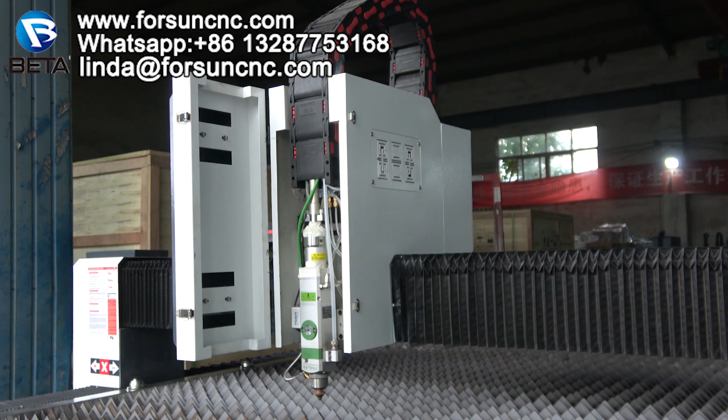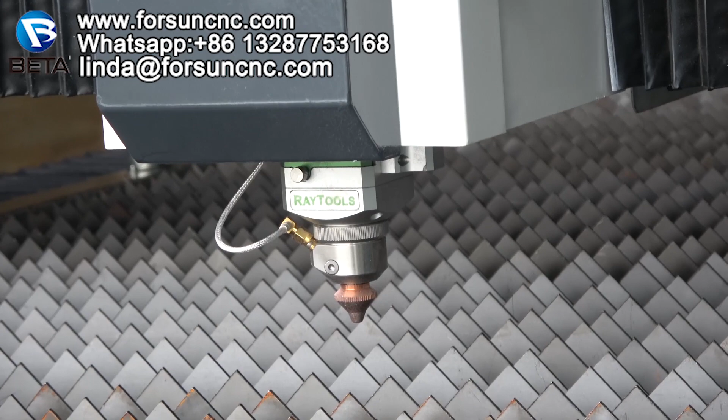First, I will introduce the controller to you. For the controller, we have two parts: one is a controller in the computer, another is a remote controller. For this, this is the CypOne we use.

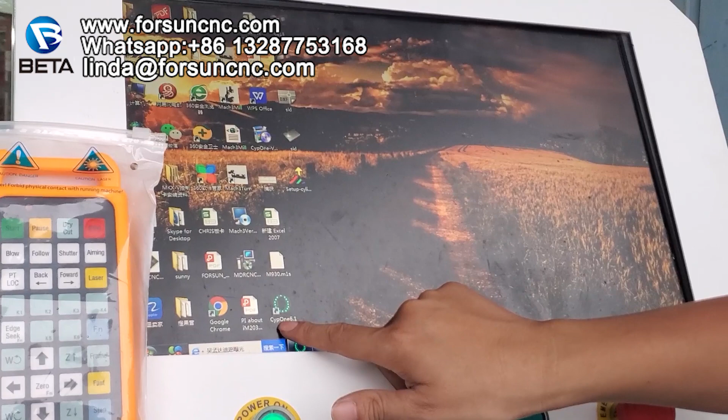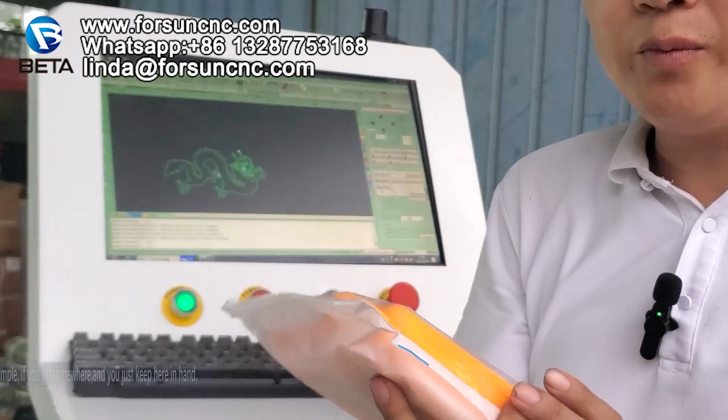This is a controller. When we open it, it will be like this. And this is a remote controller. If, for example, you go somewhere, you just keep it in hand, then it is okay. But make sure there is a Wi-Fi connection to the controller. This one connects to the computer, then this one can be used.

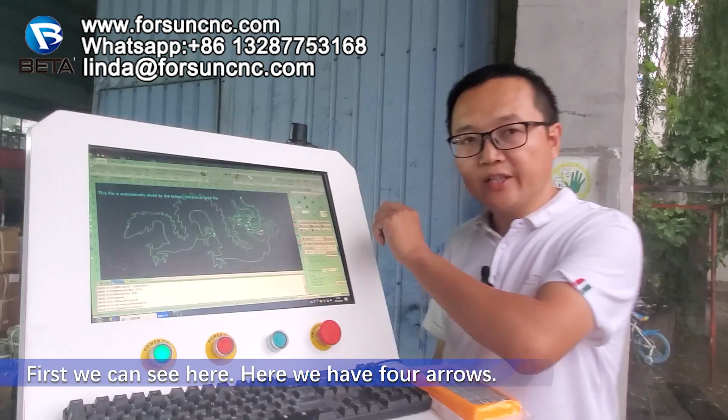Now let me introduce the controller, how to use it. First we can see here, we have 4 arrows. This arrow is for the X, the horizontal 2, it's for the X. The vertical 2 is for the Y. And here is for the Z, these 2 are for the Z.

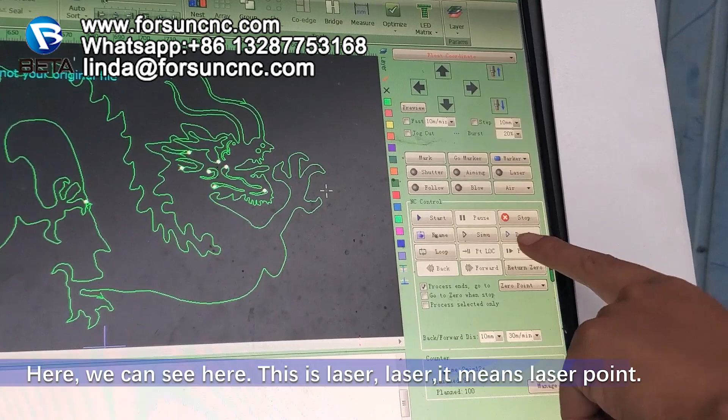Here we can see, this is laser. Laser means laser point follow. When we push the follow, the laser head will go to the position where it will cut. And blow is for the air blow. And here is start, start is for the program start. For the others, always no use.

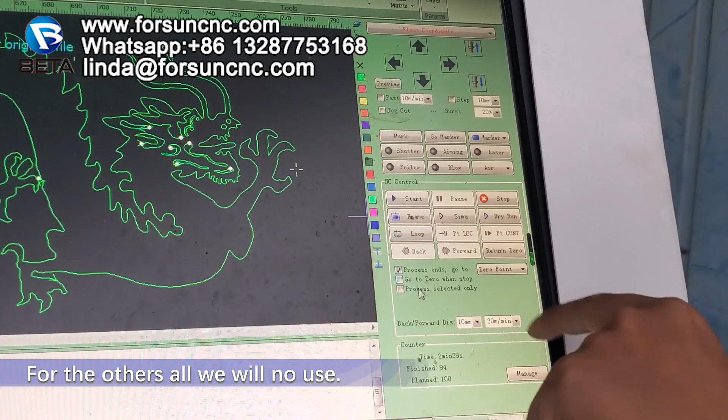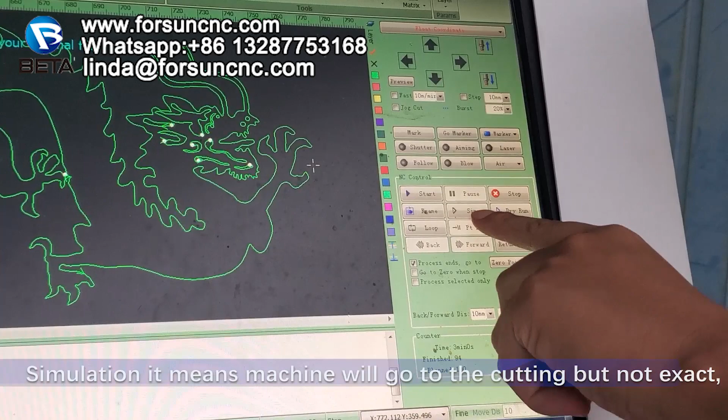Here has one frame, we can see frame. When you press frame, the machine will move to the frame first to check whether the cutting material is out of the space or not. This one is a simulation. Simulation means the machine will go to the cutting but not exact, just for checking.

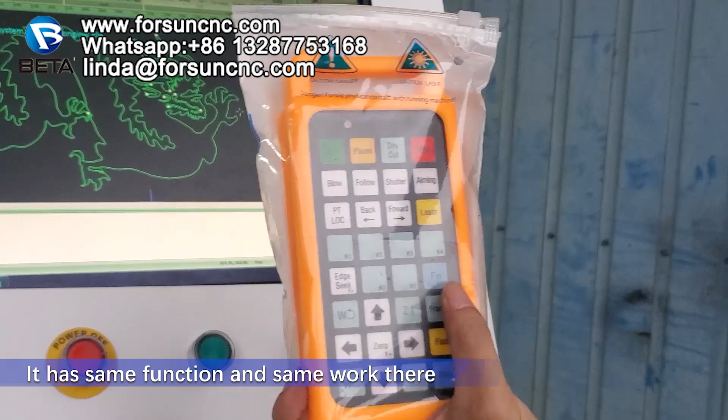Same thing for the laser, for the remote controller. It has the same function and the same work there.

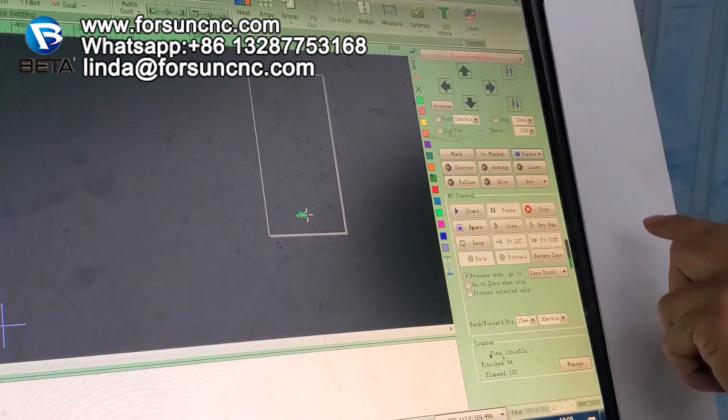Here I want to introduce the marker especially. For example, when you work on one plate or several plates, you need several working start points, then we use the markers. When we open it, you can see there are 6 marks. 6 marks means 6 working start points, that means you can set 6 working start points there: 1, 2, 3, 4, 5, 6.

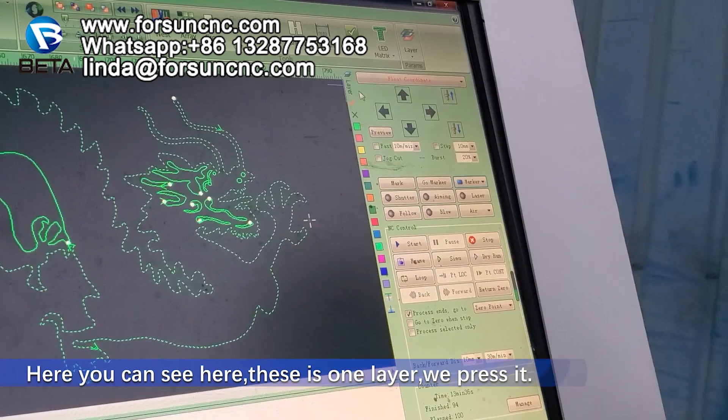You can see here, there is one layer. We press it, we press here. Here has a layer, you can see here, cut speed. Here we usually need to set. And here is a lift height, here no need to set.

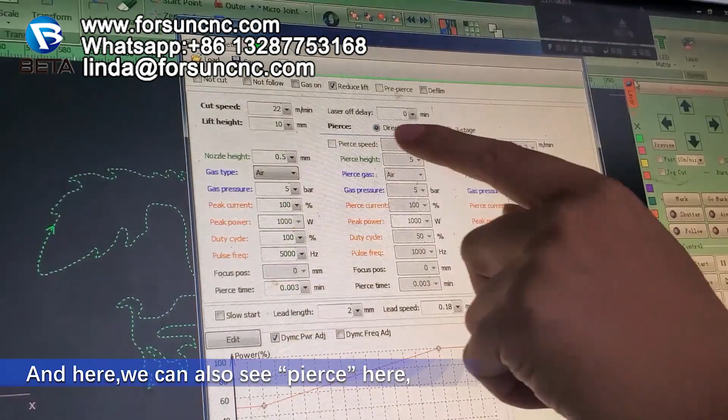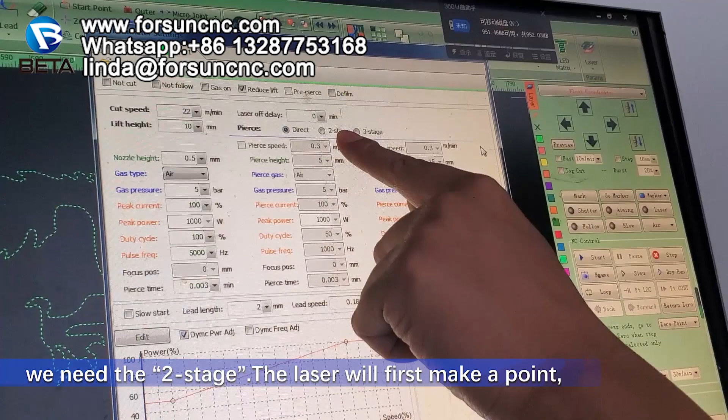When you cut different thickness, you need to set a different cut speed. And here we can also press here. If for very thin material like 1mm, 2mm, something like that, we use direct. But if we cut thick materials like 5mm steel, we need 2 stage, it means the laser will first make a point there, then second cutting. If 10mm, something like that, we need 3 stage, it means the laser will work 3 stages first.

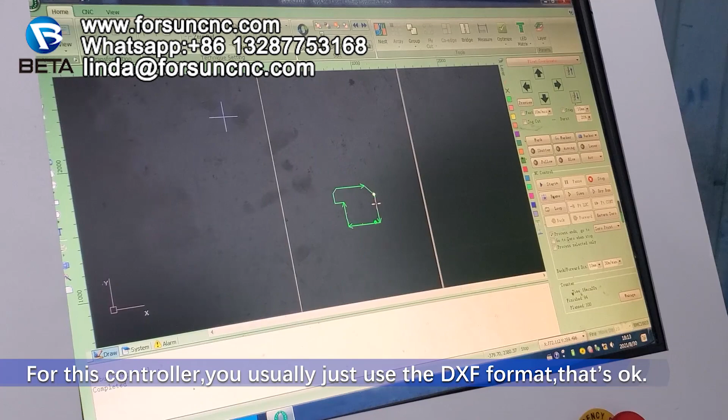The next step is how to load the program. For this controller, you usually just use the DXF format, that is okay. For example, the file first, then we find it in the files. For example, this one - this is the file we need to cut.

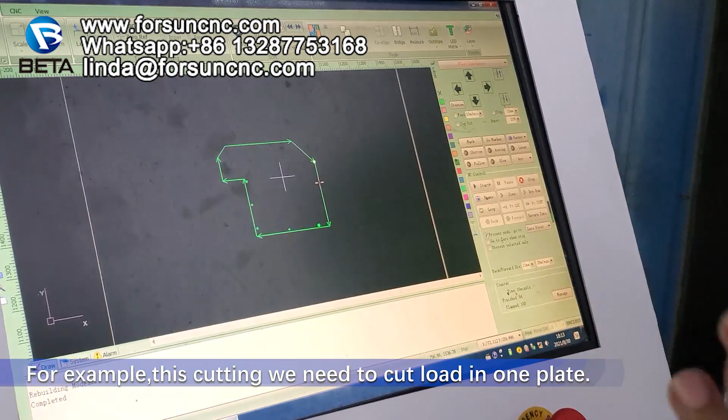For example, this cutting, we need to cut a lot in one plate. Then how to do it? Let me teach you step by step. For example, we cut this cover just now, we just load into the controller. First we need to choose it, then we need to calculate, measure it.

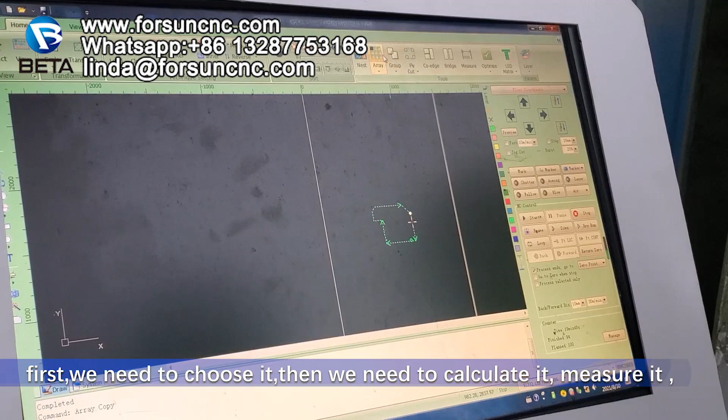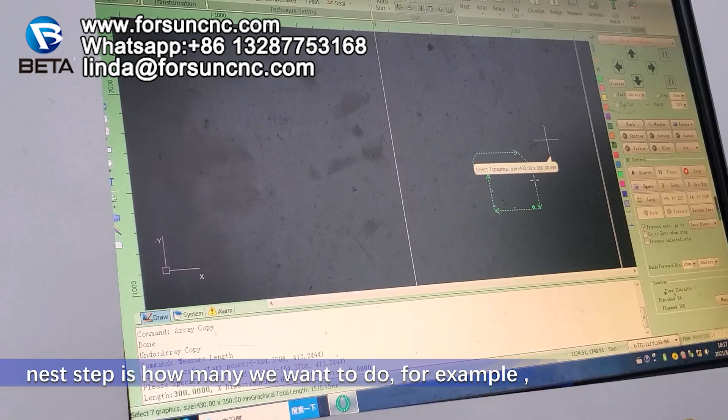Is it correct or not? Measure - you can see we can measure it. The measure here, there is. If it is correct, then we continue the next step. Next step is how many we want to do. For example, we want to cut 16. We choose the array.

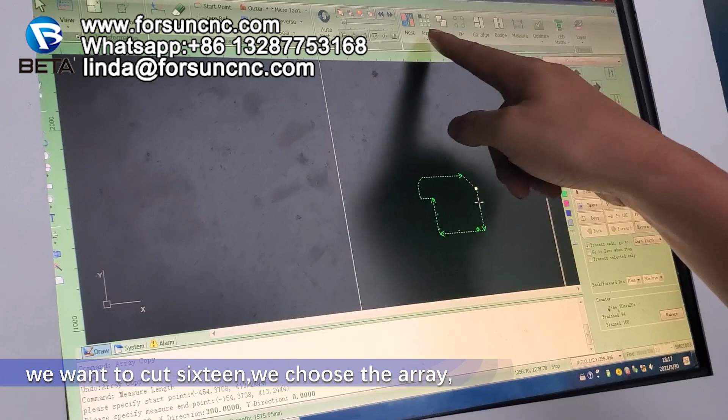Okay, 16. It means row 4. This one also 4. 4 by 4. It is 16. Okay, you can see now it is 16.

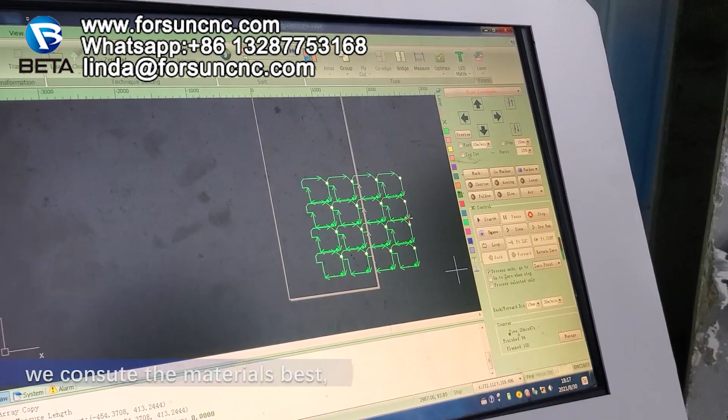Then we do the nesting, because we need to know how many plates we need and how to cut, we can save the materials. This is the best. We choose the nest. For example, if our material is 1.2, 2.4, this is our material, then we just press OK.

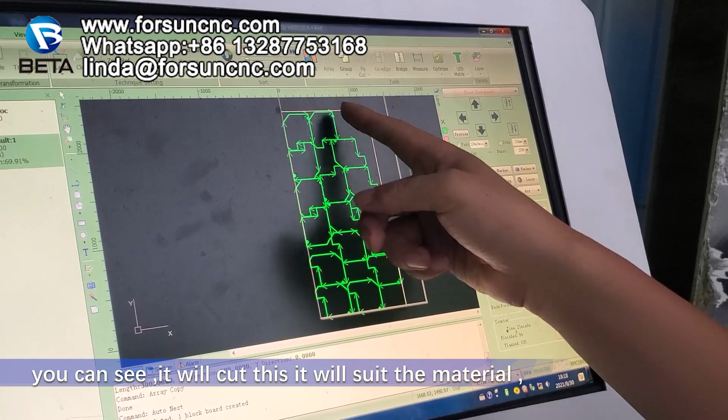Then you can see it will cut like this. It will suit the material. It will cut like this. It is a nesting function.

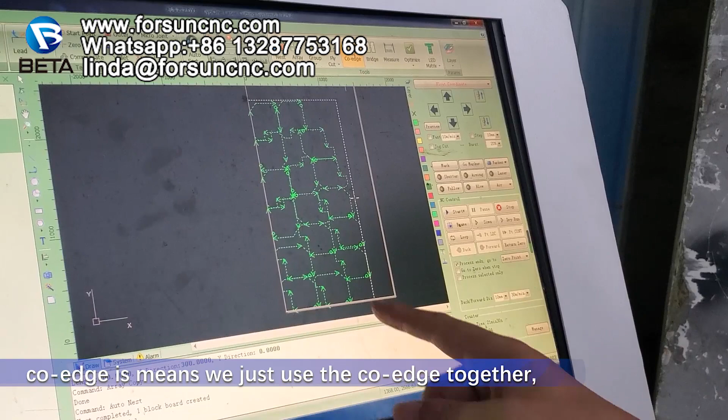And here we also want to show you two things. One is a bridge, one is the co-edge. Co-edge means we use just the edge together.

You can see here, nest completed, one block board created. It will use the co-edge together. Here is the bridge. Bridge means it will connect there a little.

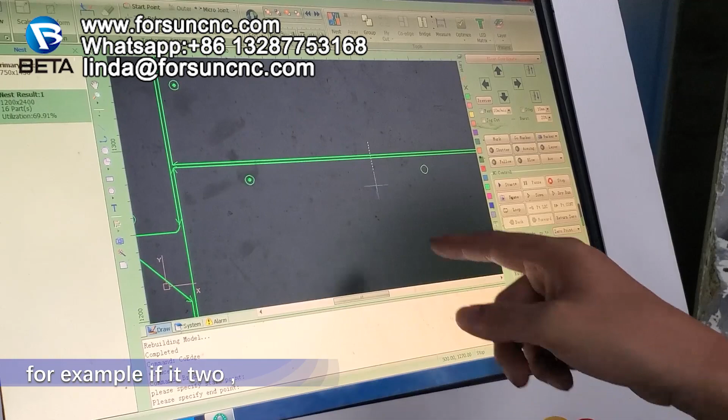For example, if this piece, we don't want them to cut down completely, we need to have one bridge. Then you can set some parameters here. We press OK. Then it will be bridged there.

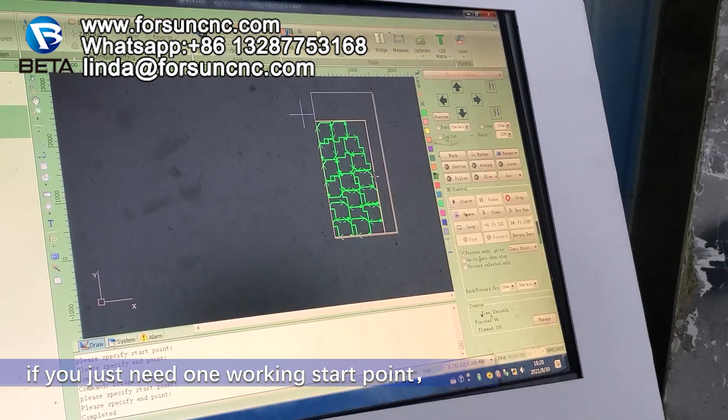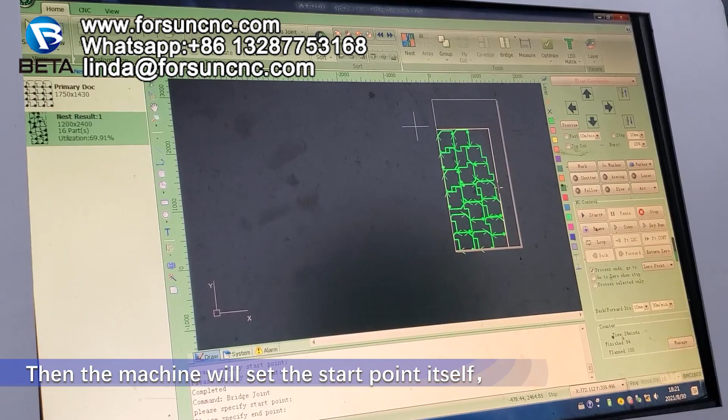For the fiber laser machine, if you just need one working start point, then no need to set manually. For example, if we want to cut this plate here, we just move the fiber laser head to be here, and then we press the frame.

Then the machine will set the working start point itself. Of course, if you want to set some other working start point, for example, you want to set 5 or 4, just use the markers. Later I will introduce this to you.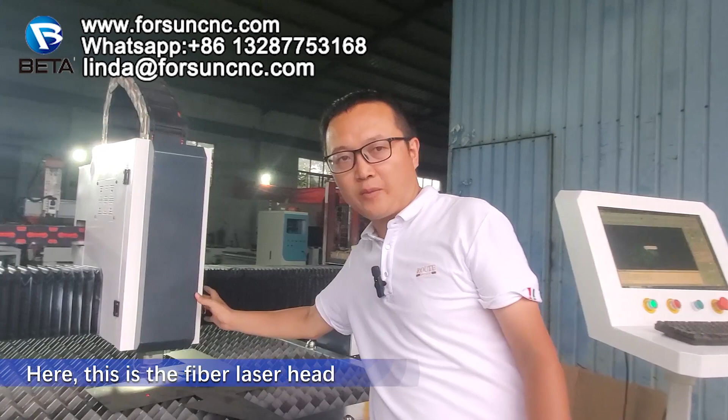Now let me introduce the fiber laser head to you. This is the fiber laser head. We made one cover for the pretty look and to also protect the laser head. When we open it, you can see.

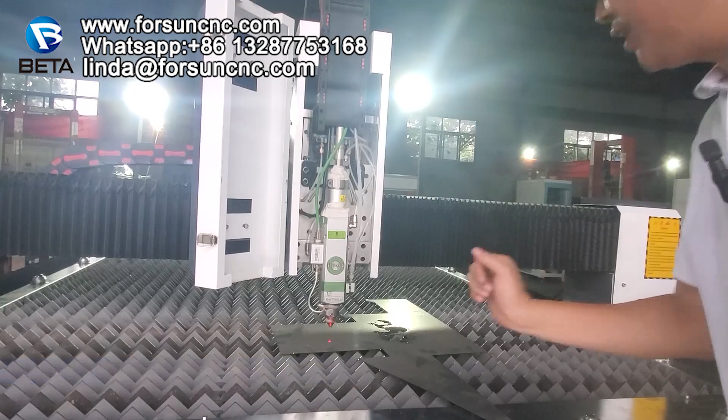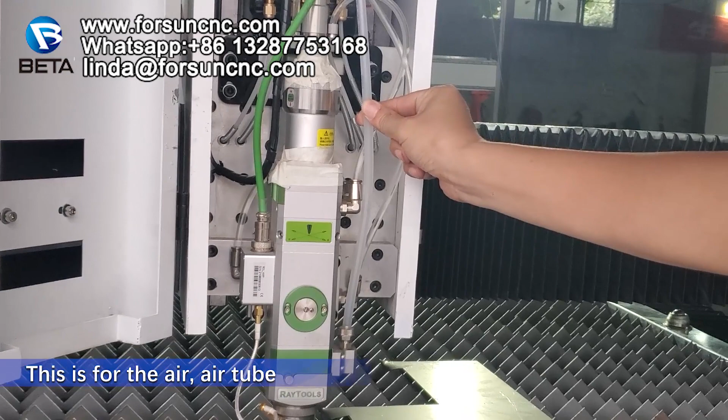Here we use Raytools. This is the brand we used. And here you can see, here is one tube, this is for the air tube. And these tubes, others are for the water tubes. Here has one electrical cable.

It connects to here. This equipment is for the height adjusting. For example, if the plate we put here may be uneven, like this or like this, not flat, the laser head will adjust the height itself by this one.

And here we also have the red dot. Red dot position means the laser will cut here. The most important thing is here, this one.

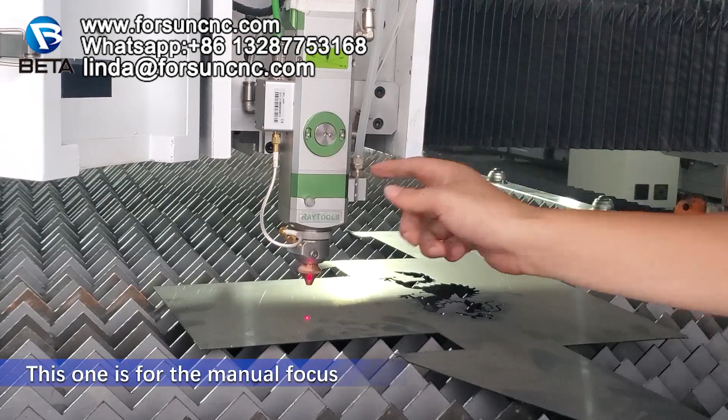This is the focus. This one is for the manual focus. Usually speaking, there is one mark here. You can see there is one mark.

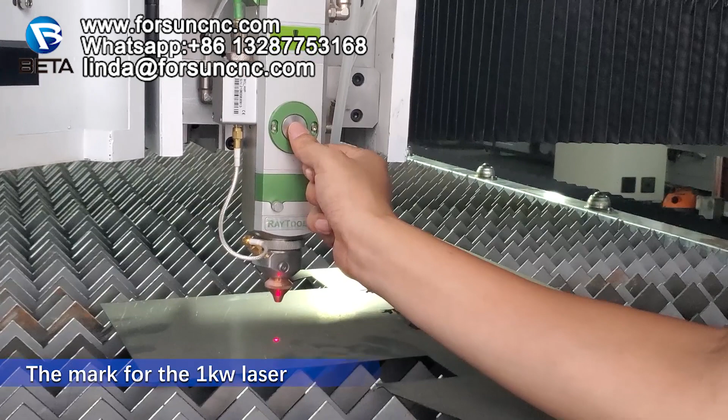See clearly, one mark. The mark for the 1 kilowatt laser, when it is at 0, it means we cut 1 millimeter for the best effect. For 1.5, you need to adjust to 0.5 or something like that. But it's better you test yourself and adjust according to the exact situation.

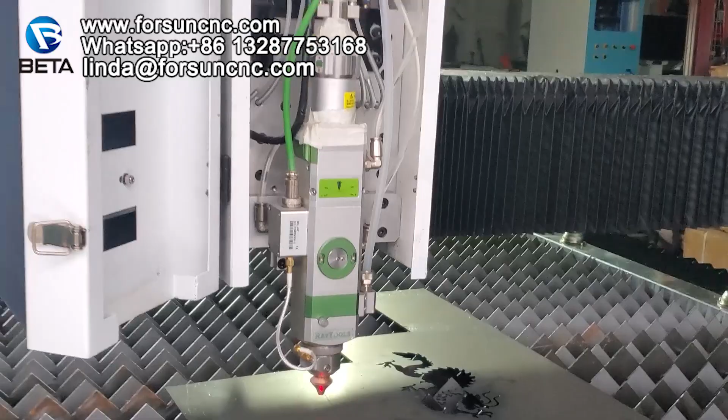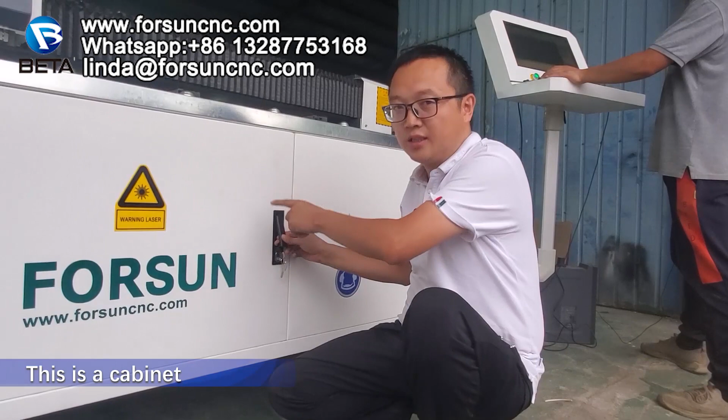Now I will introduce our cabinet inside. This is the cabinet. This is our cabinet inside.

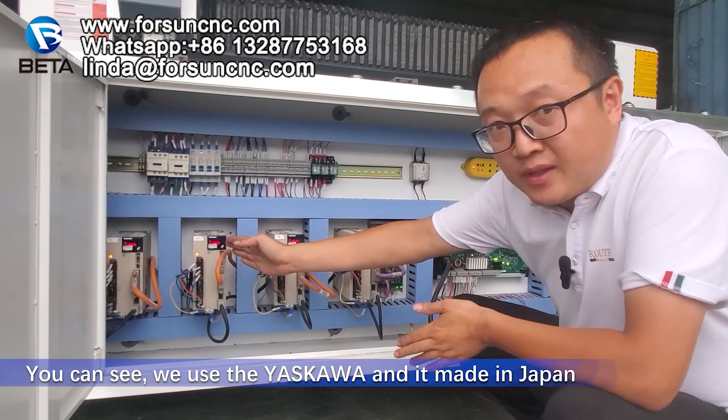You can see we use Yaskawa made in Japan, and also Schneider spare parts. It's made from France.

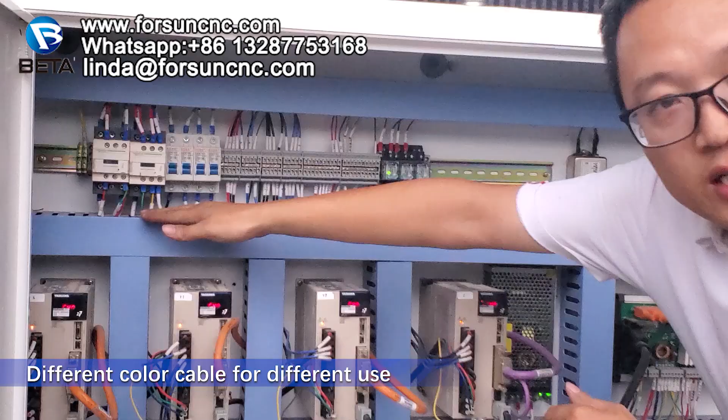You can see for our machines, different color cable we use for different purposes. Light green, yellow, red, black, different colors for different uses.

This kind of color coding is used for American, Canada, UL standard, and also for the CE standard in Europe. And also each cable has English writing there. You can see every cable has English writing.

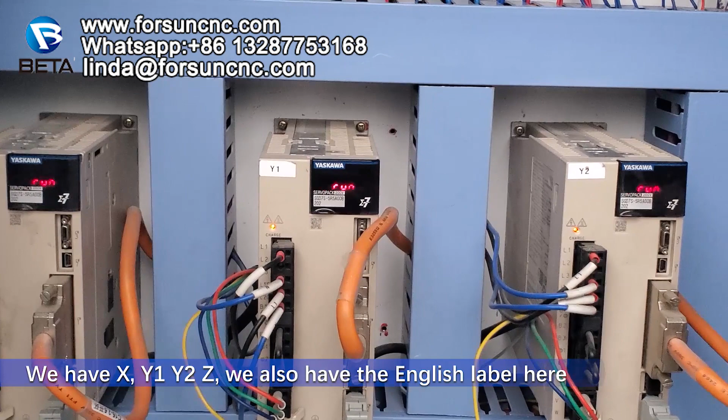And if the cable has some function, we also have the English explanation. For example here, this is for the compressed air. We write compressed air. And also for the Yaskawa, we have the X, Y1, Y2, Z. We also have English labeling there, so it's easy for the customer to understand and find the problem.

This part here is for the controller. We make one plug for you here. This plug can be used for the computer or something else. It will be easy for the customer to connect the power.

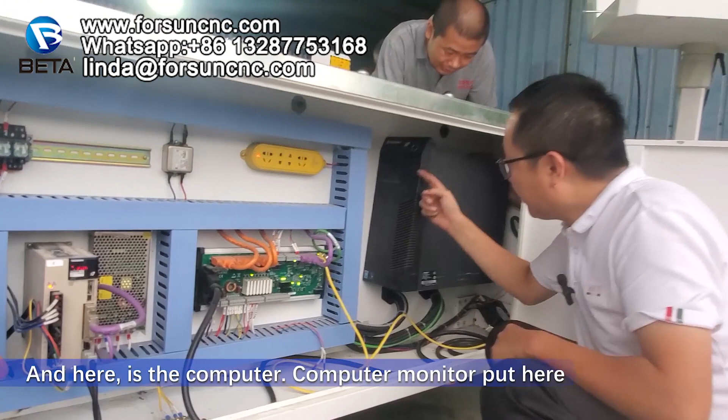Here is a computer monitor. We put the computer monitor here, it will save space. Then the customer uses it, and it will be much easier because the controller also has the computer buttons.

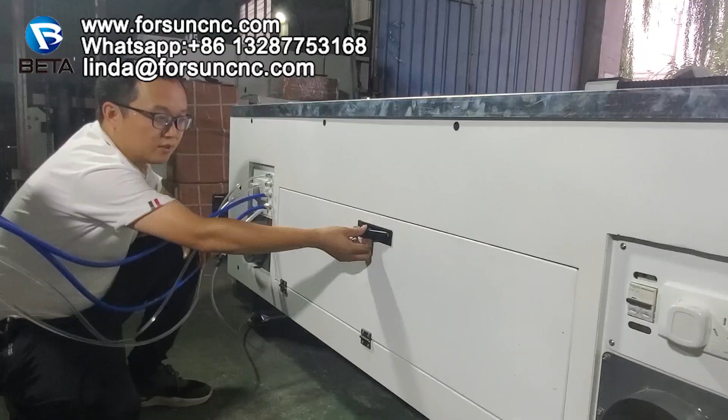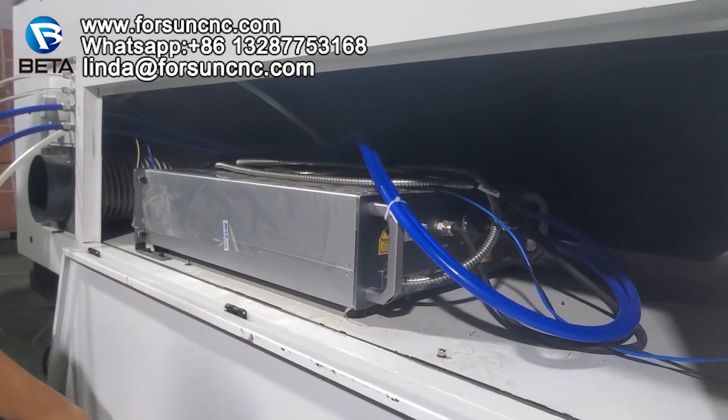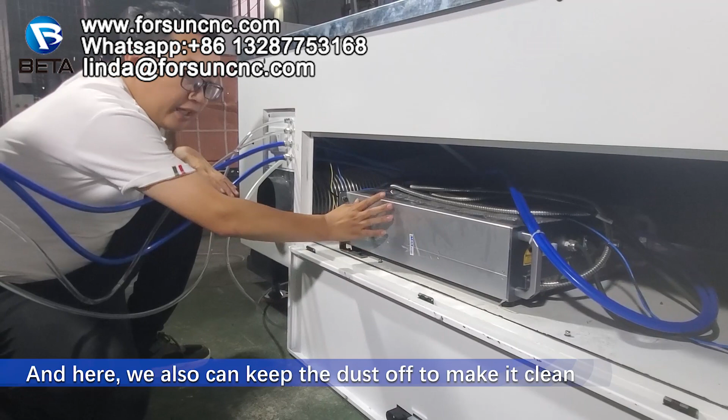So put it here. Okay, here we make one cabinet. This cabinet is for the fiber laser source. We put the fiber laser source here to save space and for more safety, because the fiber laser source is very expensive. If we put it outside, it is easy to break it manually. Here we also can keep the dust off to make it clean. So we put it here.

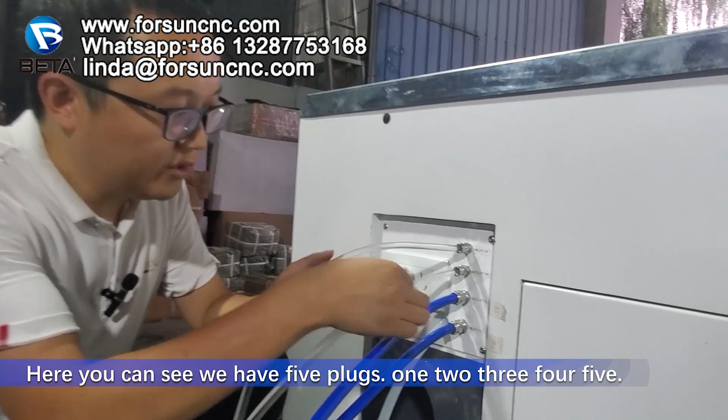Here you can see we have 5 plugs: 1, 2, 3, 4, 5. The first 4 are for the water, connected to the water chiller. And this one is for the air pump, connect to your air compressor or air tank. Usually the air pressure is 1.5 MPa. Connect to your air compressor. And here, these 4 connect to the water chiller. Later, when I introduce the water chiller, I will tell you how to connect.

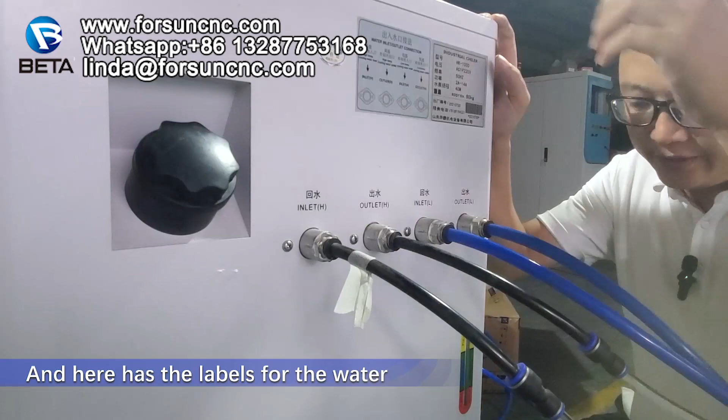This is the water chiller. This water chiller is used for water cooling for the fiber laser. Here is the water inlet, it means we put water from here. And here has the labels for the water.

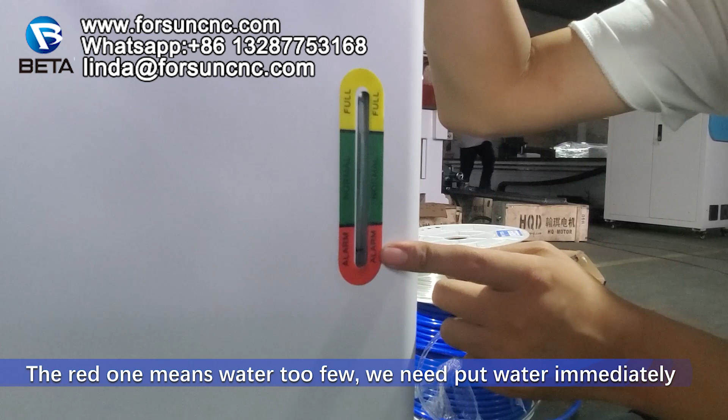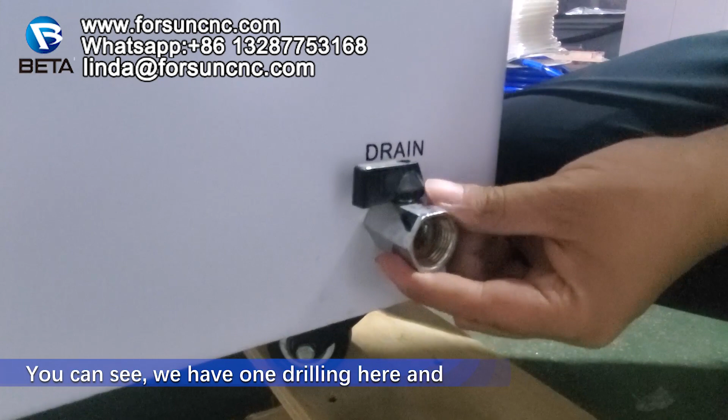You can see there are 3 colors: the red one, green one, and the yellow one. The red one means the water is too low, we need to put water immediately. The green one means the water is okay, we must make sure the water is always at the green side. The yellow one means the water is too much, we need to drain some water out. How to drain it out? Here you can see we have one drain here, to make the water go outside the chiller.

Okay, now let's go back to here. This is the most important part for the water chiller. You can see we have 4 plugs: 1, 2, 3, 4. The first one is inlet water.

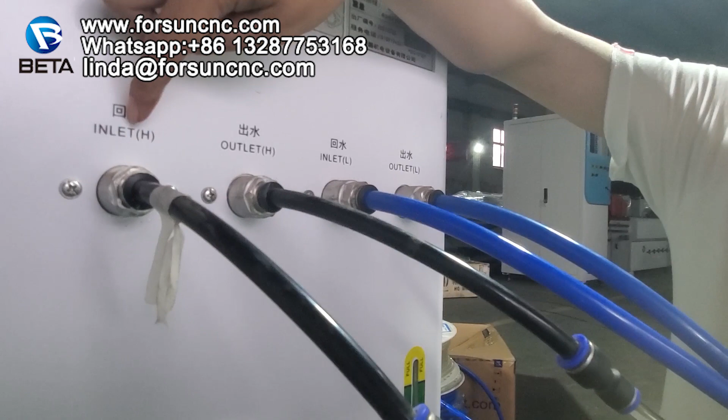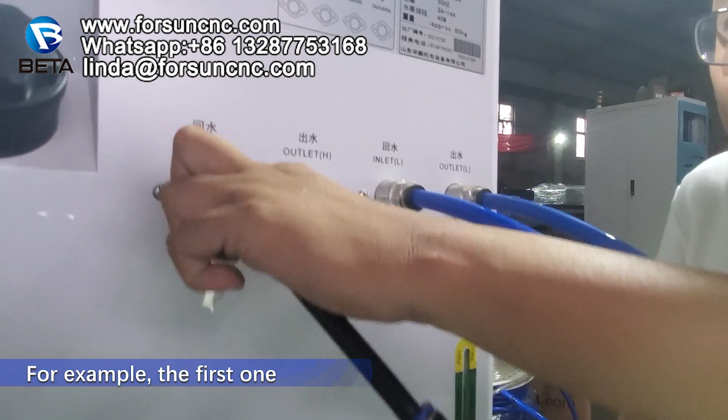Inlet water. Second one, outlet. Third one, inlet. The fourth one, outlet. Let me show you how to connect. For example, the first one, inlet in the water chiller, will connect to the outlet in the machine.

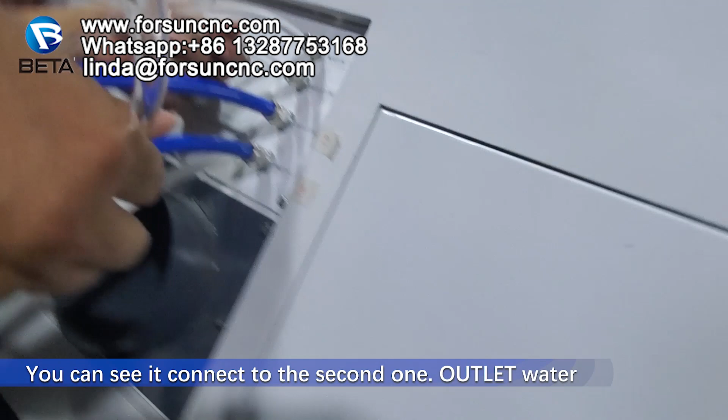Let's follow this stream, you can see the second one, outlet water. The same way, the first one is inlet in the machine, and it will connect to the outlet in the water chiller. Inlet on the machine, we follow this stream.

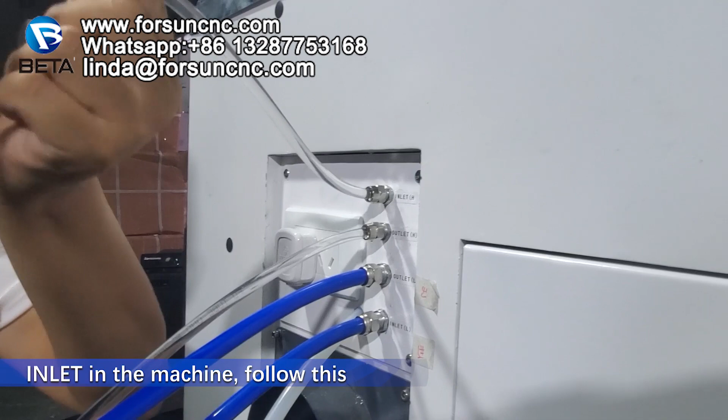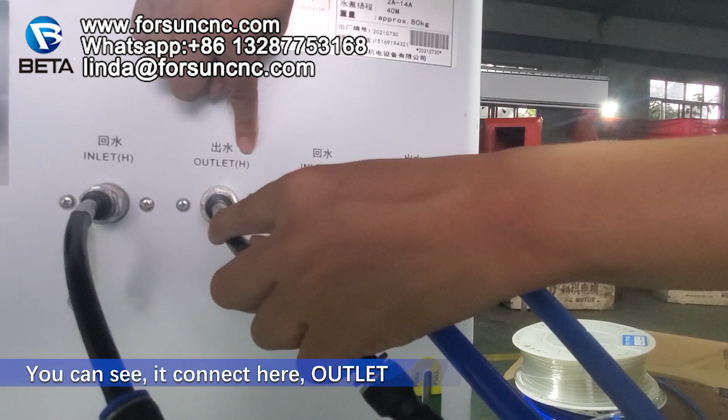We follow. You can see it connected here, outlet. The same way, this one is inlet on the chiller, and it will connect to the outlet in the machine. And the outlet in the water chiller will connect to the inlet to the machine.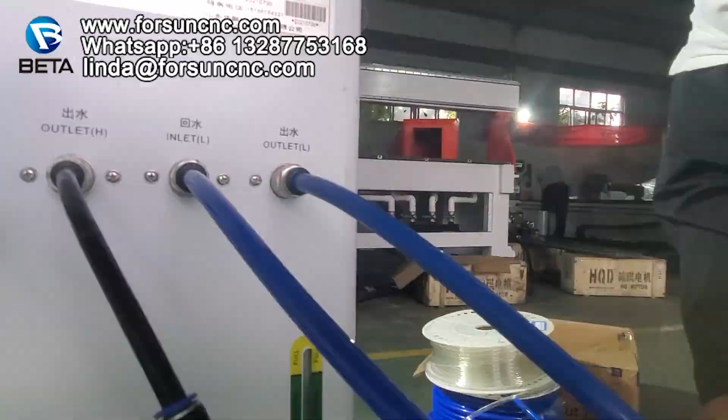Same way, here we have one tube, some plugs, and also one switch. Let me introduce to you what it is for. Here is a general switch, for the general power of the machine. If we put it down, it will power off the machine. If we put it up, it will keep the machine power on.

Here we give you two more plugs, used for spare parts. In the future, for example if you use some air fan or something else, you can plug here. But it is only for spare, no much use here.

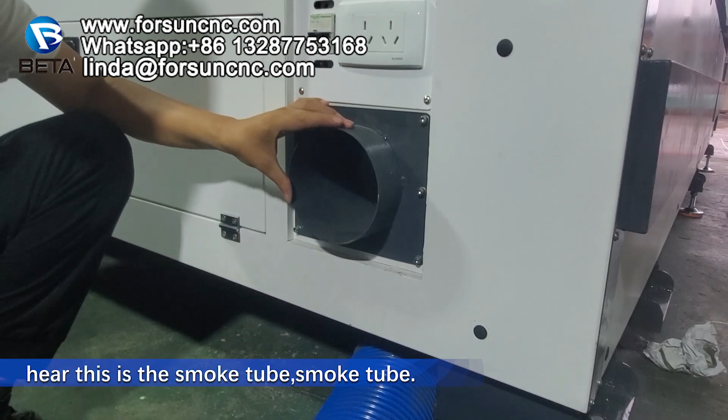Here, this is the smoke tube. This tube is for the smoke drain out. You can see here, we have the air fan.

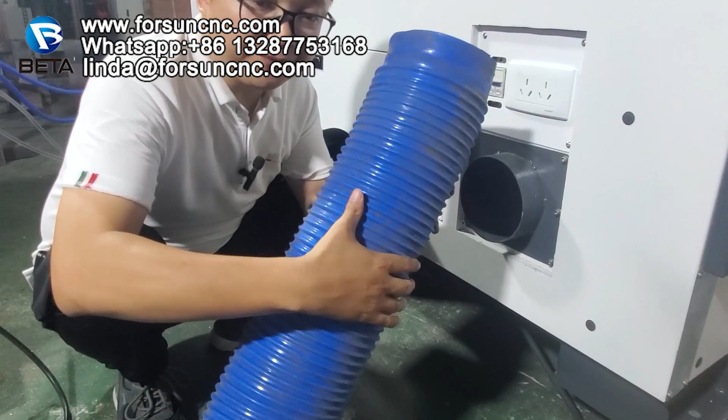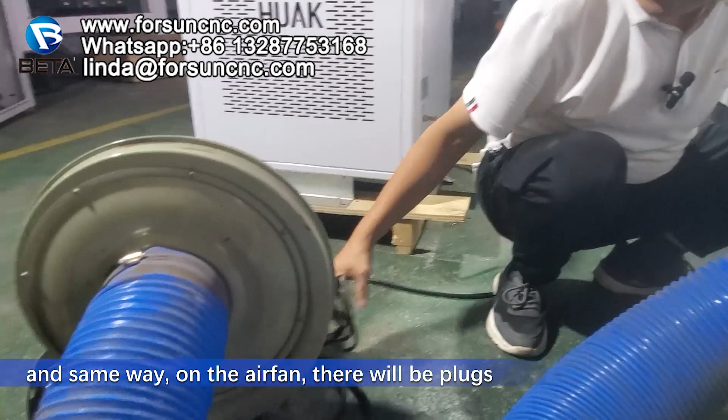Now follow here. Yes, you can see. Okay, it will connect to here. When the machine is working and there is a lot of smoke, the air fan will work, then it will take it out. And the same way, on the air fan there will be plugs. This plug will connect to here. It's okay.